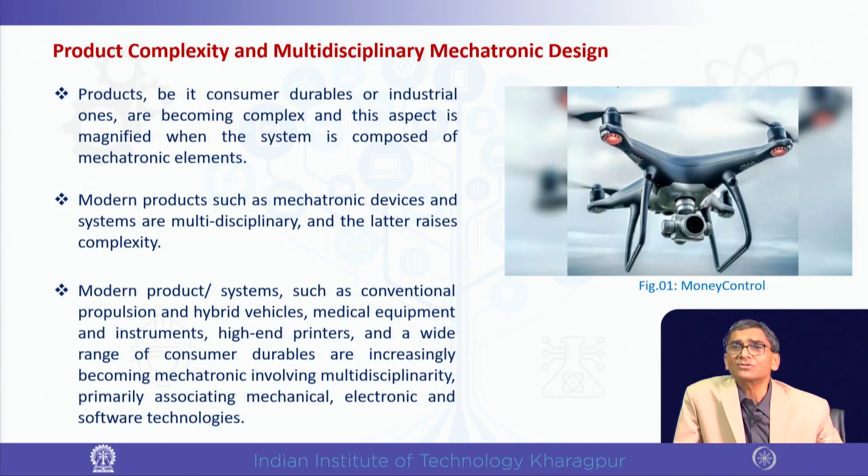Now if you just see, for example, in the consumer durable, I have already given the example, but you can study it later and get more details, starting from microwave, camera, to washing machine, toaster, and air conditioner, as I have said.

In the medical, diagnostic and test equipment, pacemaker, assisted surgery. In automotive, I have already mentioned this, but particularly if we go to the control area, say cruise control, safety airbags, engine management system (EMS), power transmission, anti-lock brake, etc. These are examples of mechatronic systems in the automotive sector.

In defense, unmanned vehicles are very common. You have seen in many situations, maybe during your course and studies, these unmanned vehicles both for the ground, underwater, air, and besides the regular things, say for example aircraft engines and controls, etc. are there always.

In manufacturing also we see robotics, CNC machines, automated guided vehicles, in flexible manufacturing systems, which carry the pallets from workstation to workstation, etc. Those are all examples of mechatronic systems. Now you understand it is practically everywhere, and therefore we cannot escape the discussion on the complexity of design and development, or product engineering, in these areas.

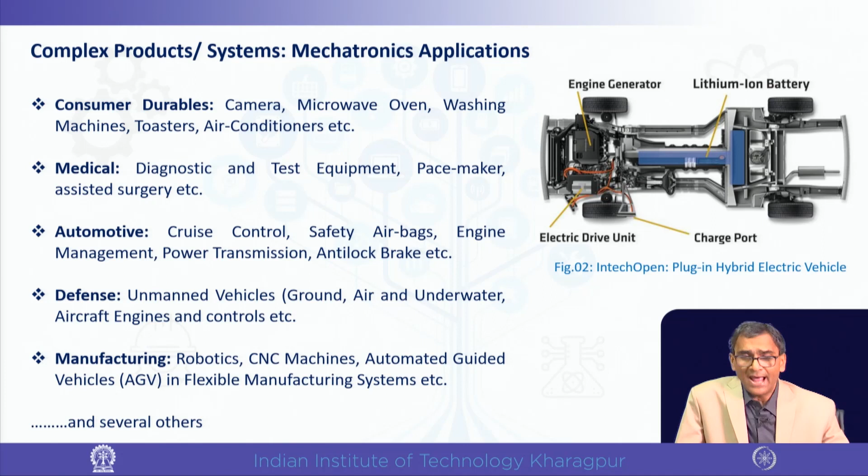Having said that, let us understand the appreciation of multidisciplinary complex engineering systems, that is Mechatronics. As I have already said, the increasing incursion of IT in mechanical engineering imparts significant advantages. Sufficient information and knowledge is coming, and that is creating significant advantages and benefits. The discipline has evolved due to such a need and is termed Mechatronics, which can be typecast between two major continuums.

One is spatial consideration—space-wise, how it will be arranged within the system, the spatial integration of mechanics and electronics, such as MID, molded interconnect devices, like the communication antenna within switches, or within certain electronic devices. Those are the molded interconnect devices that we see.

Similarly, another extreme in that continuum is the control part, that controls guided movement of multi-body systems. So this control part and the spatial arrangement part are the two physical engineering challenges. The particular mix or combination of these two in varying proportions, somewhere more, somewhere less, or vice versa, in a product system is considered depending on the application and associated design factors.

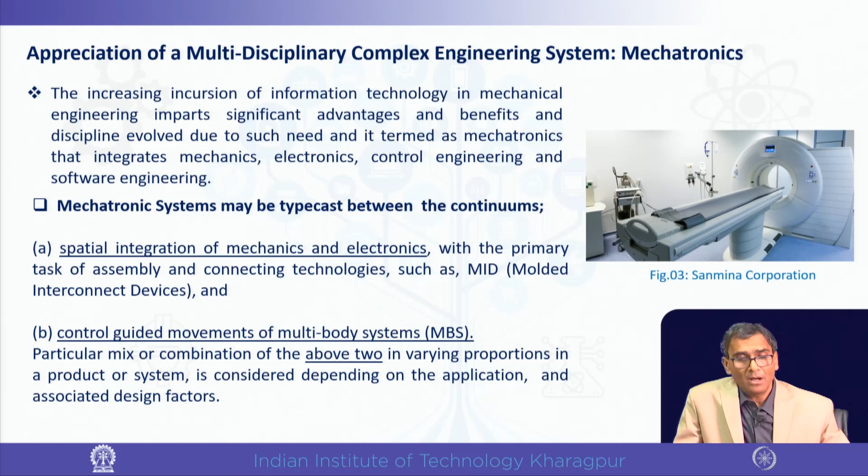Now, since there are multiple disciplines involved, what naturally comes in is the integrative product development consideration, and that brings multidisciplinary complexity. So engagement of interdisciplinary specialisms and experts is a complex task itself.

Complex in many ways: understanding the technology, understanding the nuances of technology and their interfaces, the communication and technical communication issues, and the preference of one technology over the other when optimality comes in. All these make this consideration very complex.

Continual and effective interaction and sharing between designers and developers from different domains, throughout the entire product design and producing new manufacturing technologies, is necessary because of this requirement—particularly when there are weighty interdependencies. Obviously, practically, interdependencies are everywhere, and when the interdependence is more strong or weighty, it is required even more.

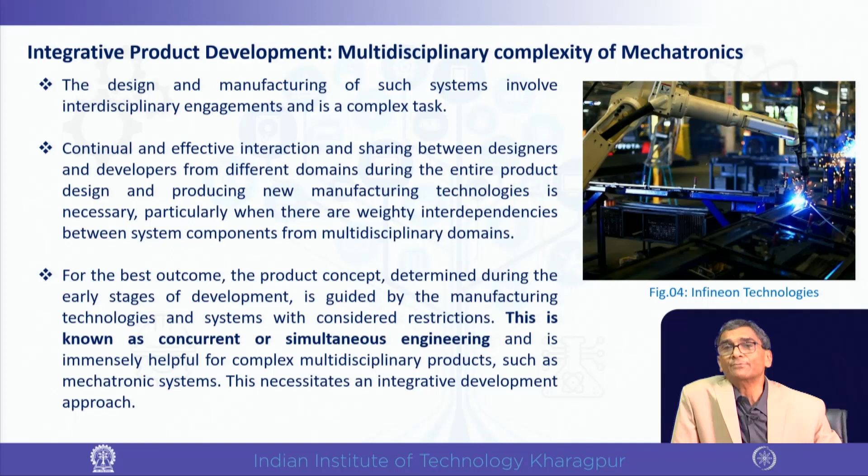The importance of concurrent engineering can be understood from the complexity between individual and collective. This diagram presents four broad areas: mechanics, electronics, firmware, and control system. Under mechanical comes mechanism, hydraulic, pneumatic, thermal, magnetic, and so on. Under electronics you find analog, digital, and mixed signal circuitry. Firmware or embedded system is where computer codes are written, and the control system works through the transfer function. All these are to be done simultaneously, at the intersection of all four.

Sometimes other considerations also come in, partly or majorly, such as material science based considerations. But at the core, what you find is mechatronics. When all these features are taken together, satisfying the requirements of specialisms and bringing out a product that fulfills or meets the customer's need, that is the objective.

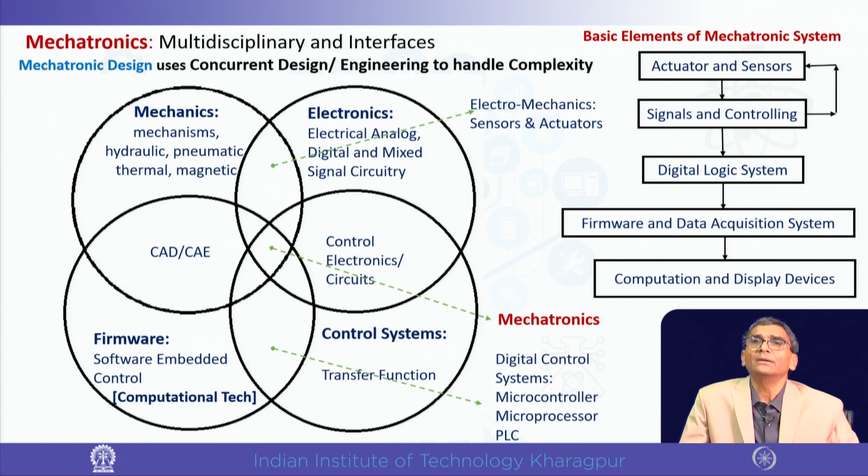We will talk about that, but let's go to the next slide to find those different signals. One thing I'd like to tell you is how the mechatronic system works. What has been intended here has been done very comprehensively - bringing the whole thing into one diagram without missing any single aspect is rather uncommon or rare. We attempted to bring the whole picture of a mechatronic system onto one screen, showing the mechanical system, the electrical system, the controller, and the display.

Basically, if you see, on the mechanical system there are actuators and drivers - it may be solenoid, hydraulic, pneumatic system, servo motors, stepper motors, or even DC motors - and that feeds to the sensor. But feeding to the sensor actually comes through the mechanism, which operates through certain displacement that it makes. So that mechanism changes, and that is sensed by the appropriate sensing system.

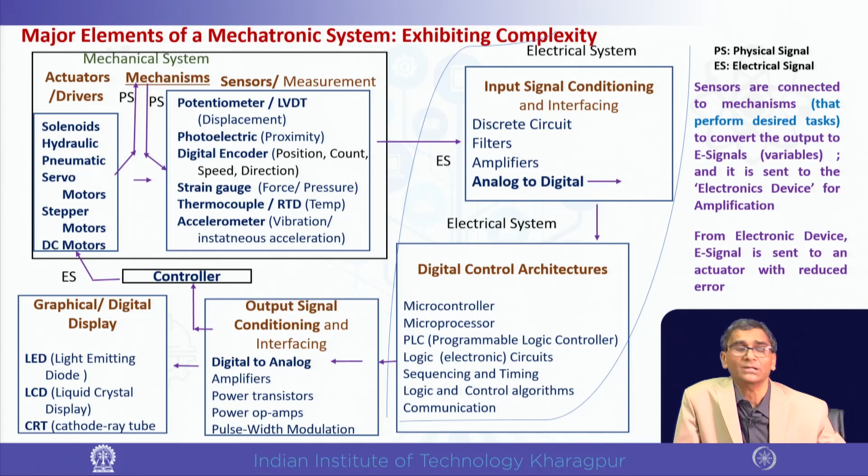Now once we are done with that part, we would go to, as promised, the set based understanding of set based designs. What is it?

As I have already explained, set based designs are those where individual specialisms create different sets to be finally assessed, combining different possible sets for optimal performance. This was actually done in the Toyota company to start with - it was part of their lean processes, one of the lean design processes you may say. So that is where the set based design differs from the traditional approaches.

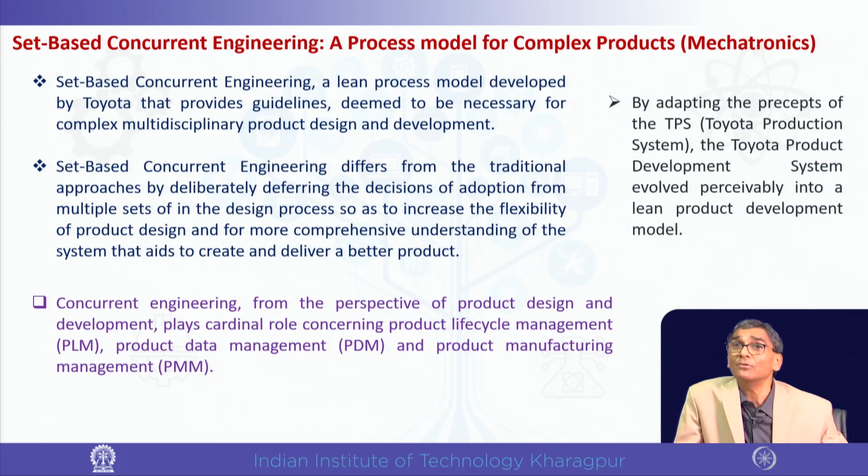I have already discussed PDM, Product Data Management, Lifecycle Management, and also Product Manufacturing Management, where we see that CAM, Computer Aided Manufacturing, comes in. But here our focus will mostly be on the design development part. CAM is also important, and PMM comes in when we are talking about the complete manufacturing of the product. Now, a quick primer on concurrent engineering and set based design very quickly.

The product design has to be in sync with the entire continuum of product ideation to launching in the market. So, end to end, that is what I mean. So, everywhere all these functionalities, starting from ideation, conceptualization, prototyping and finally manufacturing, are connected.

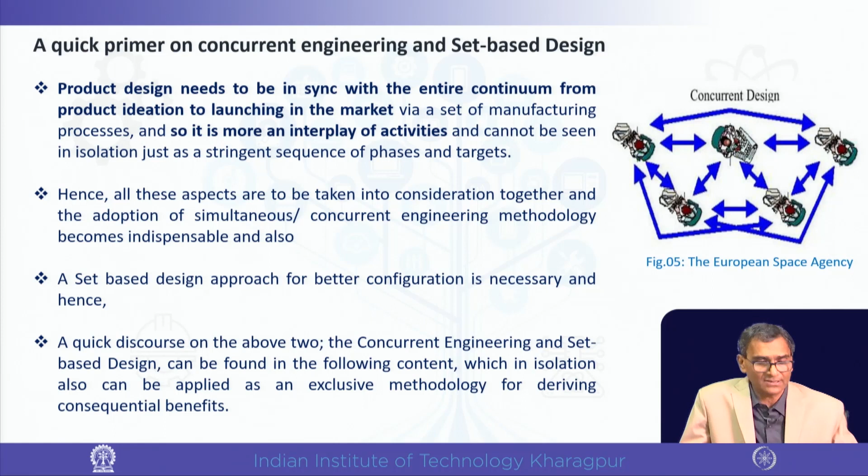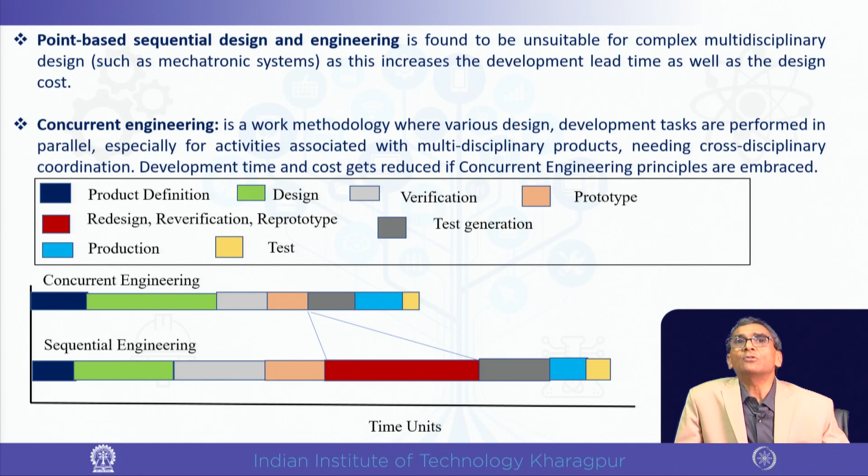We will see that in concurrent engineering, there are point based and set based designs. We will talk about that. Say function A, B, C, D going sequentially is sequential engineering. It is not concurrent. In concurrent engineering, if it is point based, say what happens,

the design solution of function A is analyzed and critiqued, meaning commented on for its failure possibilities, disadvantages, shortcomings or pitfalls mainly, and then it is modified accordingly to suit function B, C, D and whatever is subsequent. So, it is point based. Point based means A is being corrected and accordingly B, C, D are getting satisfied.

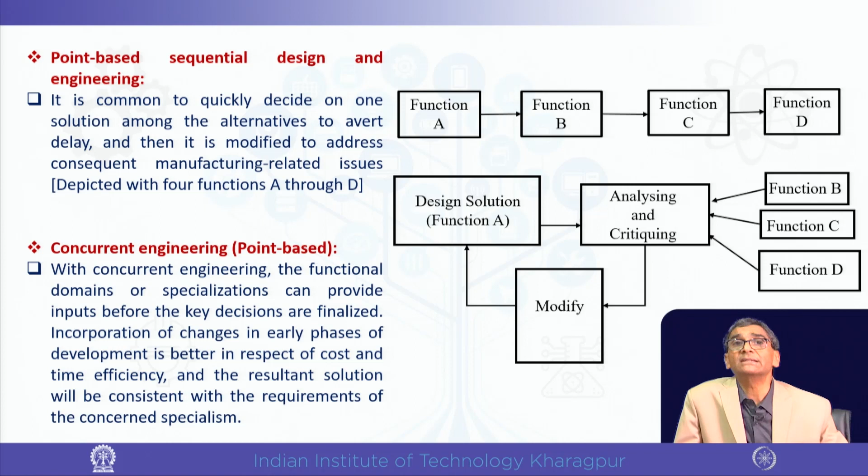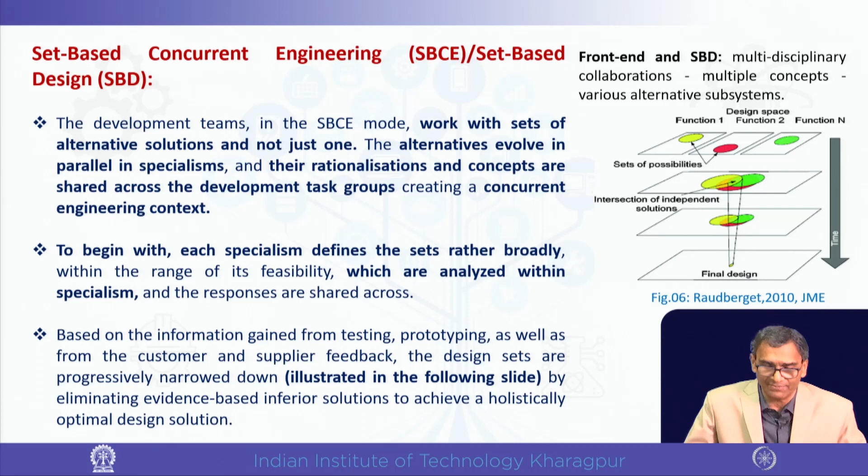which is called set based concurrent engineering or SBCE, also called set based design. Initially it is defined a bit broadly and subsequently it is narrowed down. That is what the set based concept is. In the next slide, we will see the different functions A, B, C, D etc.

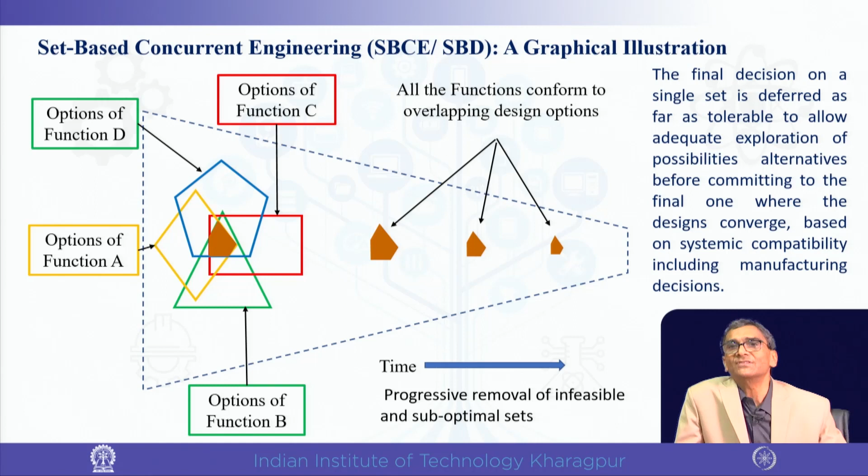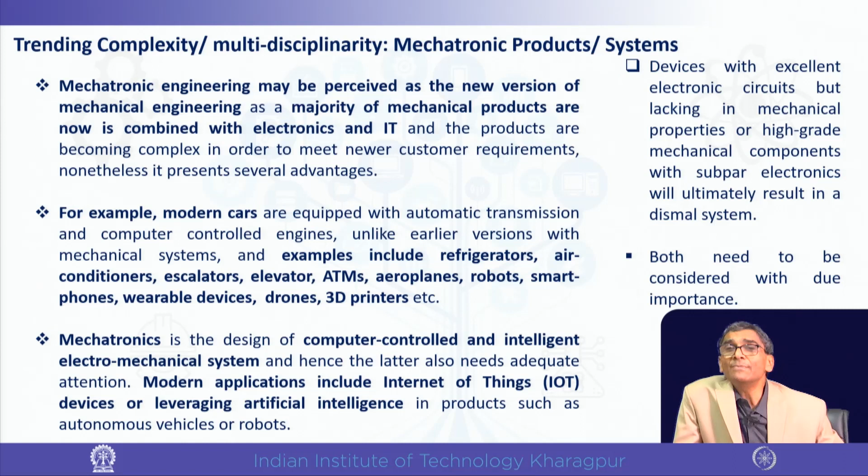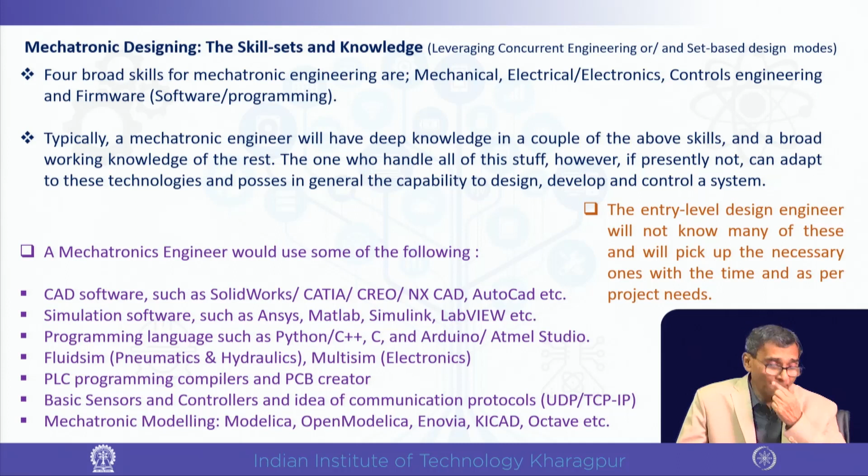One thing, do not get scared with this so-called big list; many of you already know. The thing is that the entry level mechatronic engineer is not expected to know everything. Therefore, I have written it in this orange color. If you see, the entry level design engineer will not know many of these and will pick up the necessary ones with time as per project needs. But some basic things will definitely be known to him; he should learn.

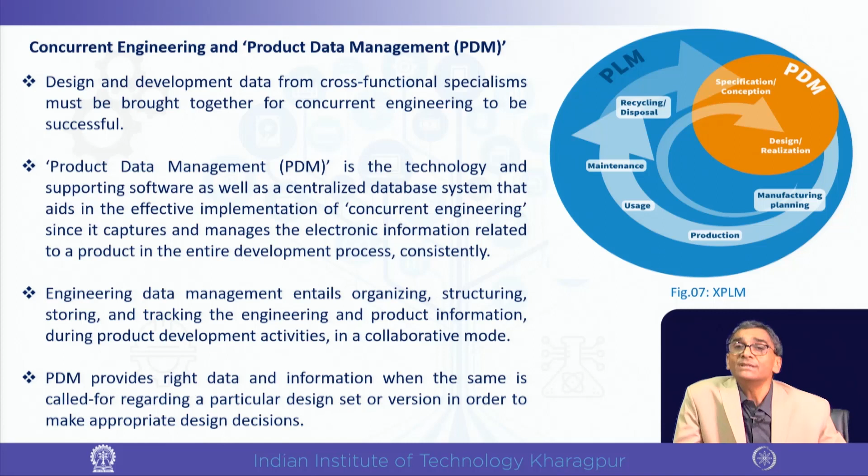And so, we will come back to the last part of this, that is PDM. We have already discussed that PDM is actually a platform, etc. We will talk again about how it is an electronic data management system, and give certain references of software or platforms available for this. Product data management is the technology and supporting software as well as centralized database system that aids the effective implementation of concurrent engineering. That is, in a nutshell, whatever it has to say. And PDM is within PLM.

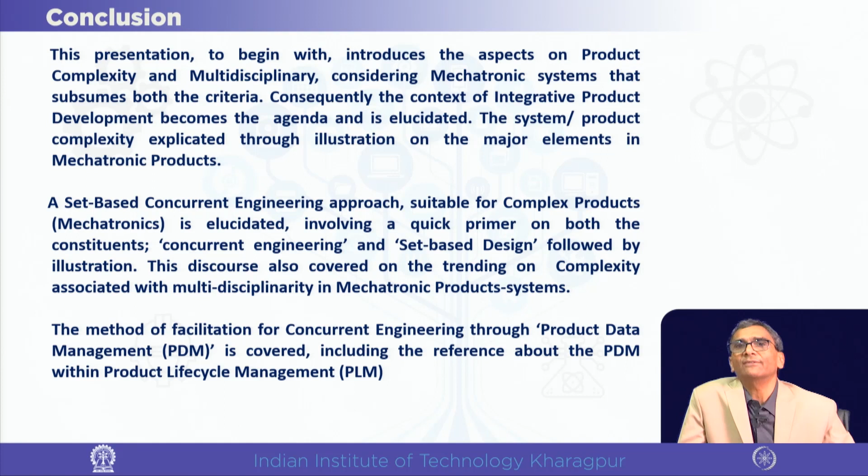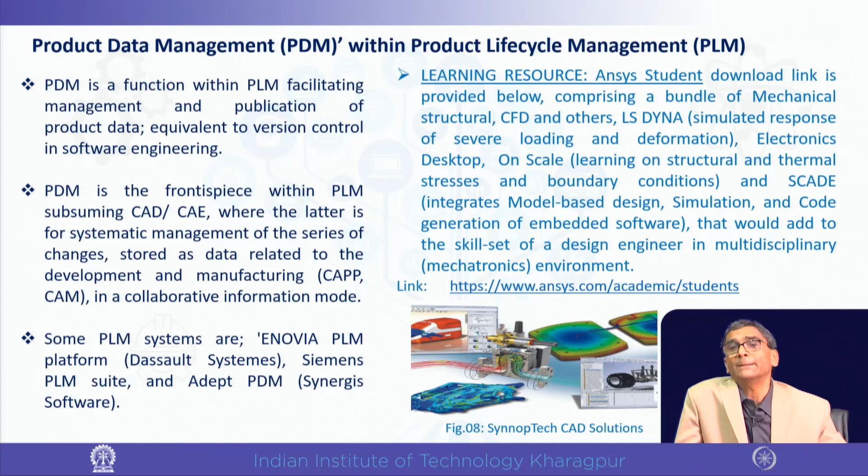Now, those are the things you will in any case be learning on the way. I have touched upon these things, named the software; at least you should know where to get them and for what. So, we have covered mechatronic issues, the complexity issues, set based concurrent engineering, and finally, how concurrent engineering will happen effectively. For that, we have talked about the PDM system, and for this I have already mentioned the Enovia PLM platform, Siemens PLM suite, and Adept PDM software; these are available, and you can always refer to them.